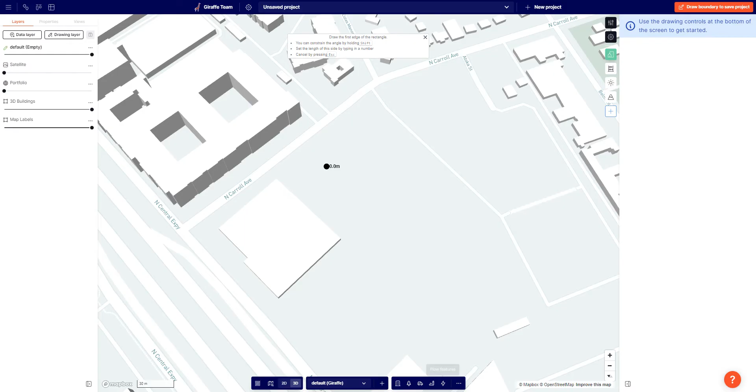Hi everyone, today I'm going to build a parametric wrap development. So the wrap is a really popular style in the US, and it means that there is a central parking garage structure.

The first thing I'm going to do is grab my Car Park USA and just draw a little car park here. I kind of want that to be double loaded like that. And I am going to make this multi-deck and have it be maybe 4 levels tall.

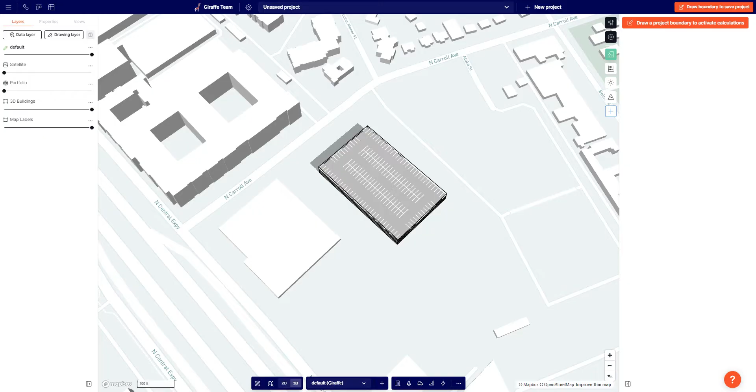So the next thing we need to do is add a wraparound of some apartment units. You can see next door there is something similar to this. The open space in between is where the parking garage is, and wrapped around that with some airspace are apartment units.

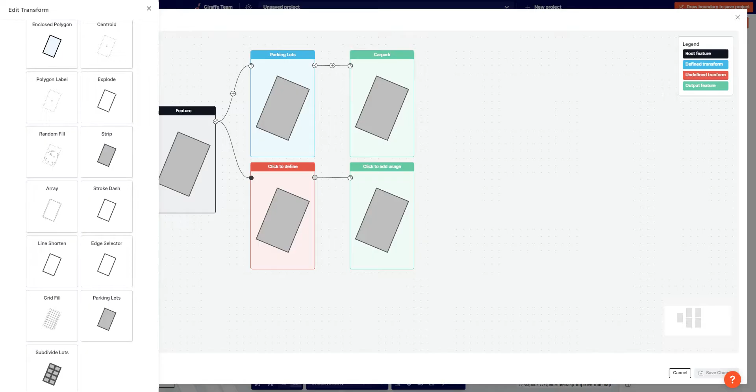So the first thing I'm going to do is jump into my flow builder, and I'm just going to add another output here. That output is going to end up being my apartment units. What I want to do is first grab some of these edges, since I want it to wrap not all the way around, so I'm going to grab some of those edges there. And then I'm going to offset those edges a distance.

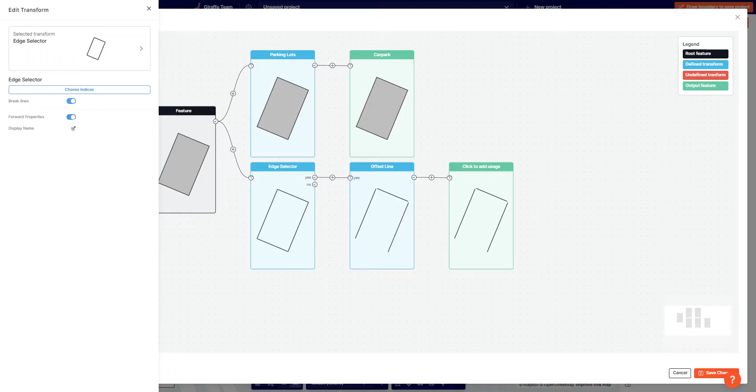So maybe I'm going to offset those, since I'm not going to do these double loaded corridors, maybe we're going to have a 5-foot airspace here. And I need to go back to my edge selector and make sure I'm not breaking those lines so that my apartment area is continuous. So I'm just going to save that so we can see what's happened.

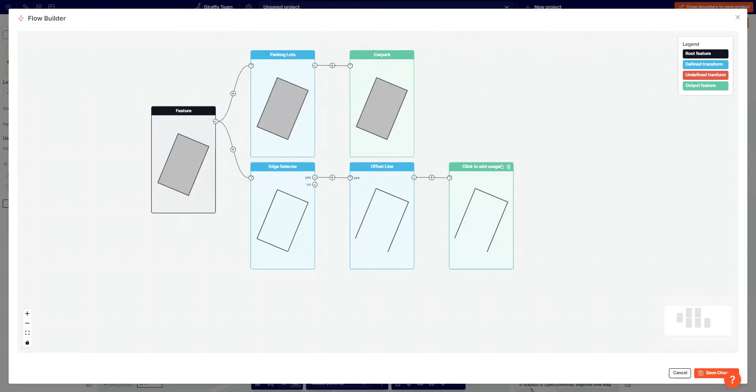So I just added this line offset all the way around my parking structure here. I'm going to go back into my flow builder, and now what we need to do is turn this line into our apartments. So I'm just going to grab that line and add my apartment algorithm.

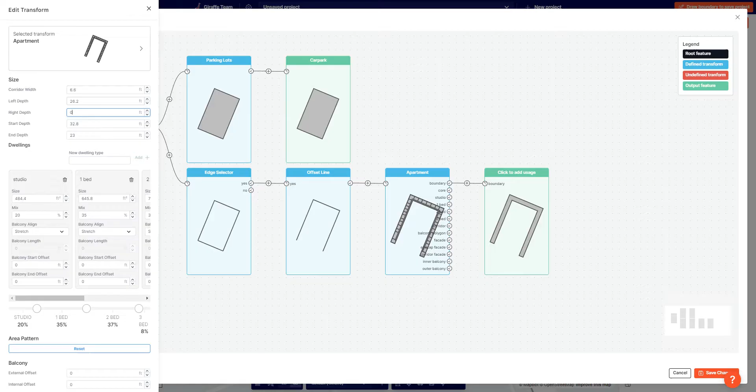Of course, the apartment algorithm is double loaded by default. So what I want to do is take away one side of this, my inner side, and then I end up with my output just going around the outside.

Of course, I need to add all of my units here. So I'm going to add all of my corridor. I'm going to add even my balcony polygon. We're going to make this nice and fancy here. So I'm going to add all of my usages to these, including my corridor.

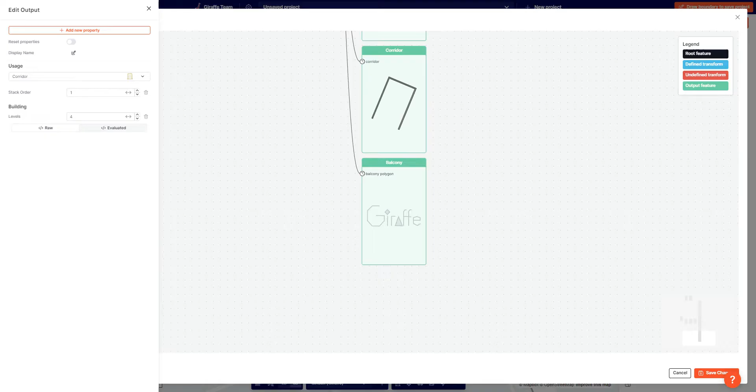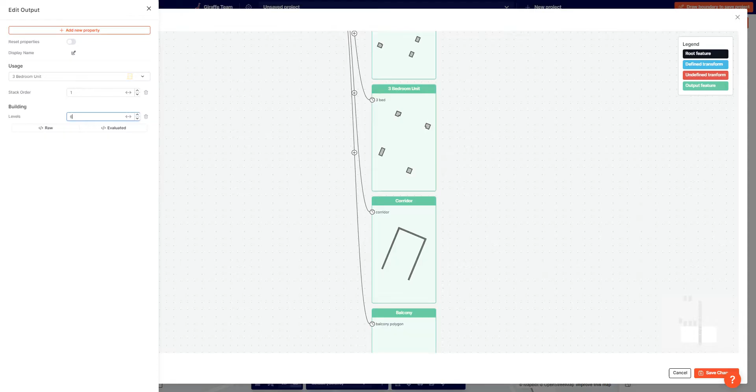And I am going to make these all by default 6 levels, just so that we're all on the same page as I'm going through. So my 3-bedroom unit, 6 levels. My 2-bedroom unit, 6 levels. My 1-bedroom unit, 6 levels, and my studios, 6 levels.

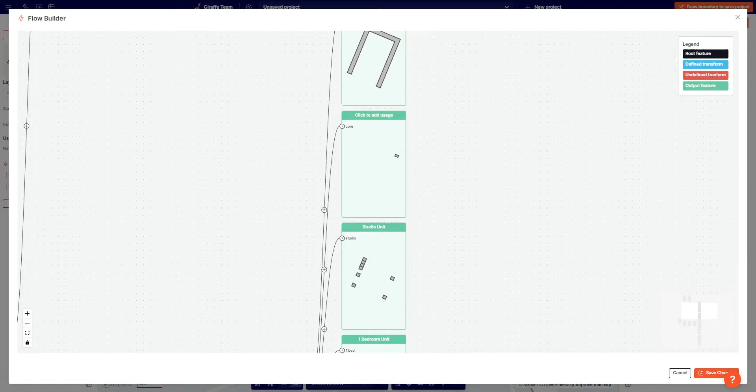Now, I also have my cores, of course. That is my stair towers. Those are important, so 6 levels. And then I also have this boundary on the first floor, so I'm going to add that as amenity space and make sure that it stacks down to the bottom. So I'm going to have just that at 1 level here.

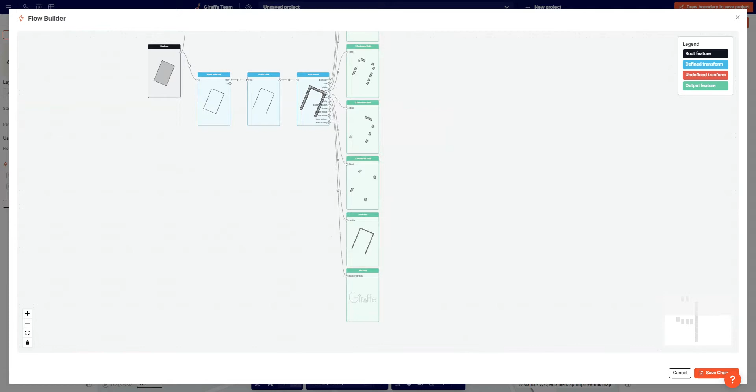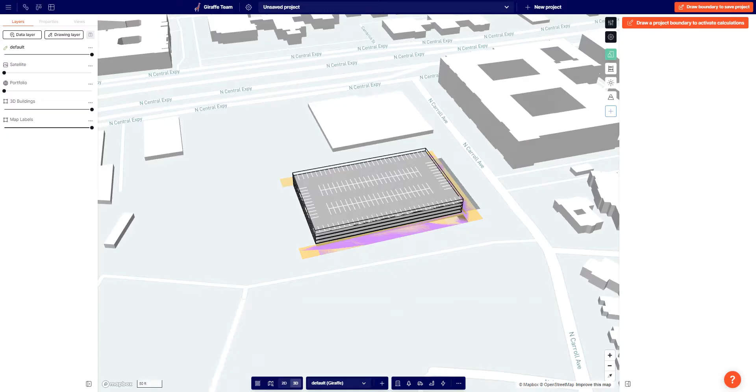Let's just save our changes and see what we've got. So what's happening here is something is flowing through this flow that isn't quite right. All of my levels here are just flat, and typically that happens when I have forward properties on something it shouldn't be. So I just went through there, opened up my offset line, and removed the forward properties.

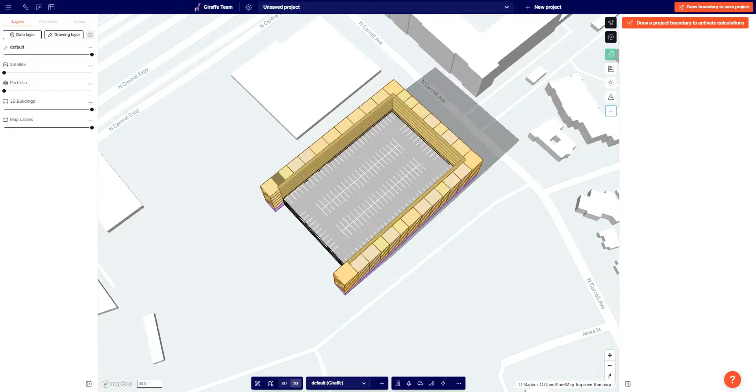And immediately what we see here is our lovely wrap structure. I've got my apartments going around my interior parking structure corridor, and I have it stacked 6 over 1 with that bottom podium. But maybe I want this to wrap along the front too and only leave part of it open.

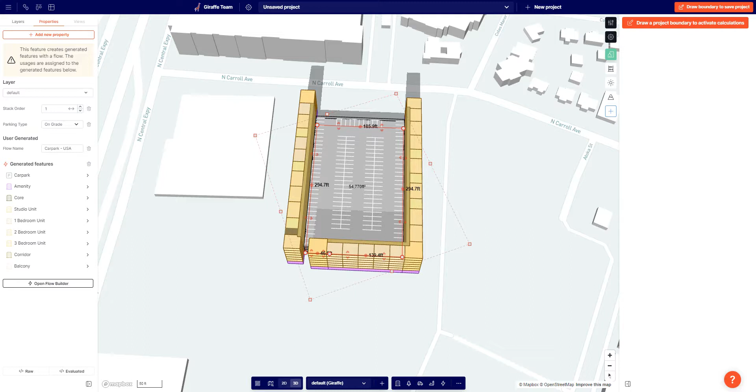So the way I'm going to do that is add some additional edges here. I'm kind of fooling the algorithm with my edge selector into giving me some more optionality here with where my edges end. So if I pop back in here and go back to my edge selector, I can add in that one that's now missing.

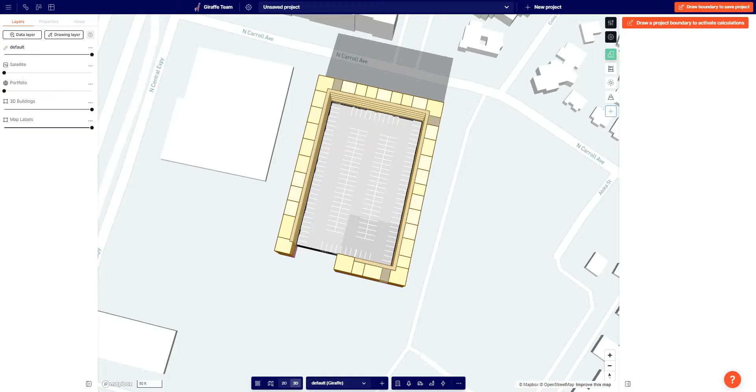And now I've got this opening sort of on the front, or the rear of the building, for perhaps where the drive-through would be to drive into that parking garage. But I've still got my wrap all the way around.

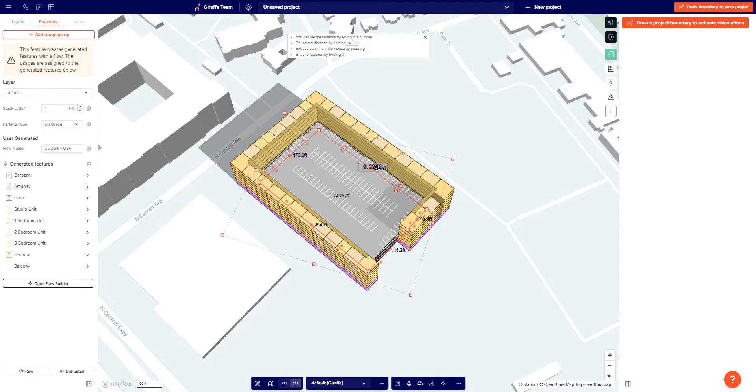Now, the best part of this is now that I've created this, it's actually fully parametric. So if I need to change the size of this structure as I adjust here, I'm going to add even more edges and make this kind of a funky shape.

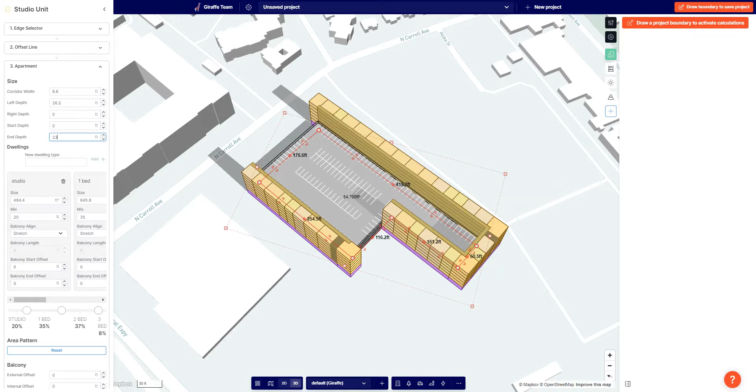I'm seeing that my overlap here is now incorrect. So what I want to do is come into my apartment and have it not have either a start depth or an end depth. So there I've got my start depth gone. And I want to add back this other edge selector.

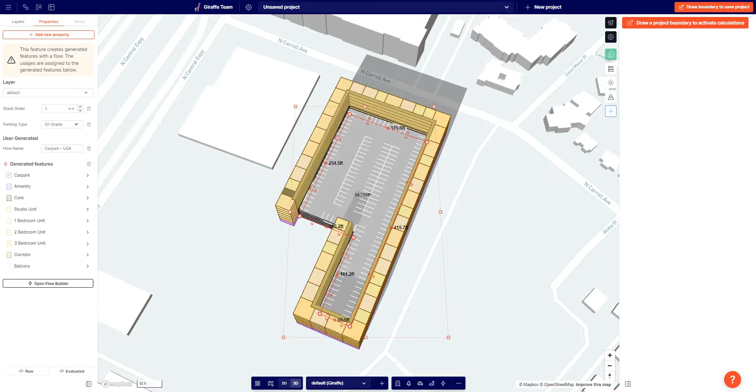But it's super easy as I'm adjusting the shape of this building, I'm not having to go back in and redraw my apartments. I'm just now changing the shape of the building and then making sure that everything is kind of lined up as I go. So that's really cool.